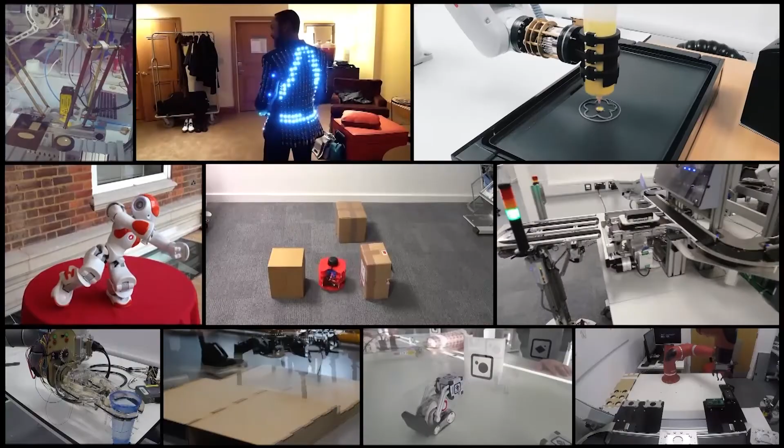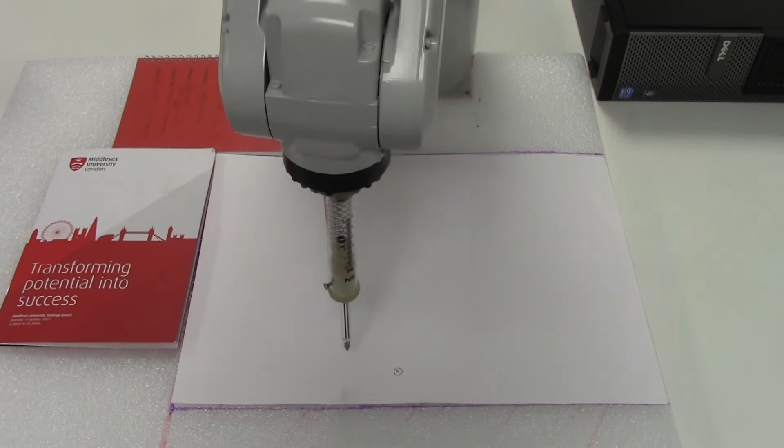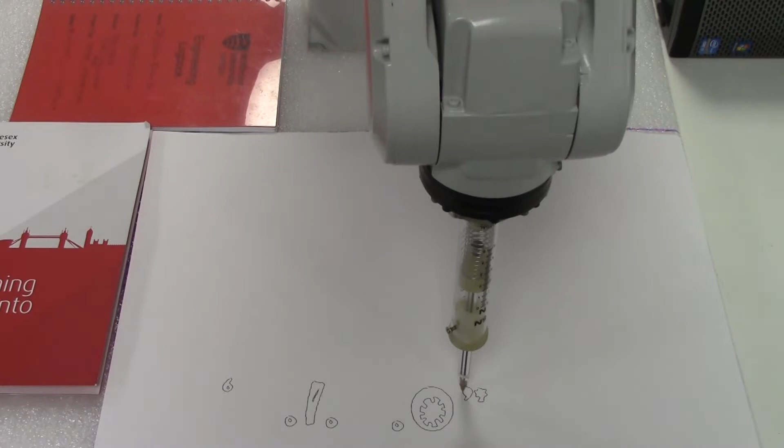In this video, we will learn how to manually jog the ABB IRB 120. Robot manipulators can be programmed to perform a certain task by moving through a series of clearly defined positions. Traditionally, this series of positions and orientations have been programmed manually.

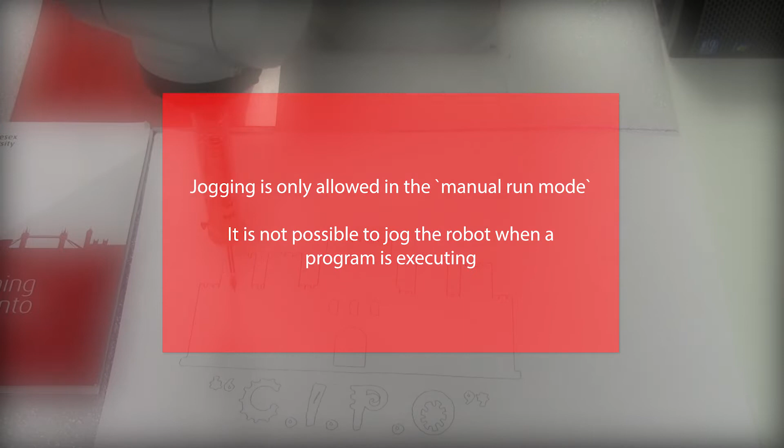Jogging is the act of manually moving a robot's joints or robot's position using a teach-pendant joystick. Please note that jogging is only allowed in the manual run mode, and it is not possible when a program is executed. However, you can jog the IRB 120 regardless of what view is displayed on the teach pendant.

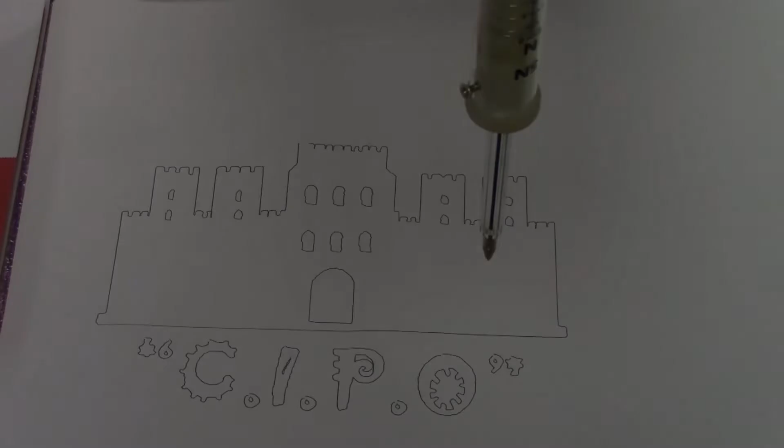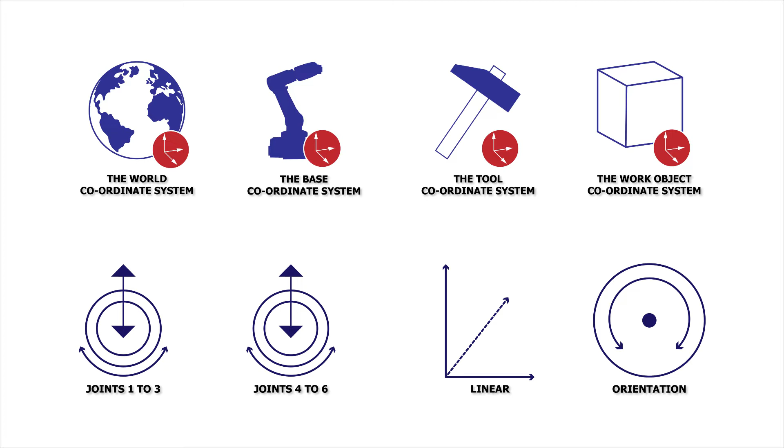The selected motion mode and/or coordinate system determines the way the robot moves. There are 4 selectable motion modes and 4 coordinate systems available by default on the teach pendant.

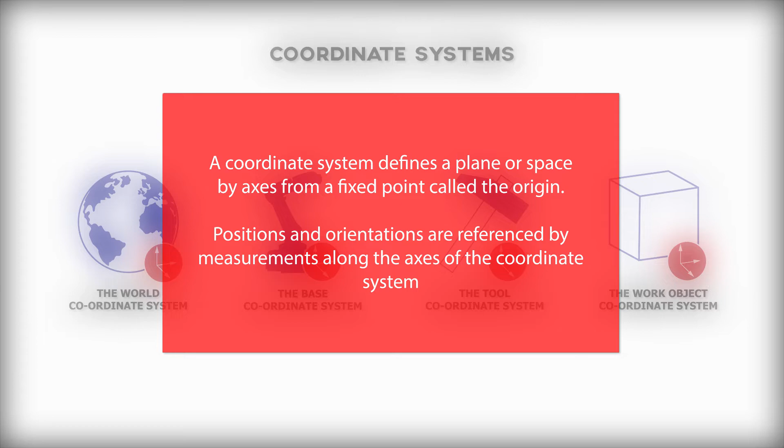A coordinate system defines a plane or space by axes from a fixed point called the origin. The targets and positions are referenced by measurements along the axis of the coordinate systems. The ABB IRB 120 uses several coordinate systems, each suitable for a specific type of jogging.

The world coordinate system defines the robot's work cell, and all other coordinate systems are relative to this world coordinate system. This is very useful when working with several robots in a workstation.

The base coordinate system has its origin located at the center of the base of the robot. This coordinate system is used to easily move the robot from one position to another relative to the base of the robot.

The tool coordinate system defines the position of the tool the robot uses when reaching the given target. This could be an end effector, a welding tool, a writing tool, or any other form of tools attached to the end of the robot.

The work object coordinate system is relative to the workpiece, and it is often the best for programming the robot to perform a specific task. To find out more about coordinate systems, please see the text in the description of this video.

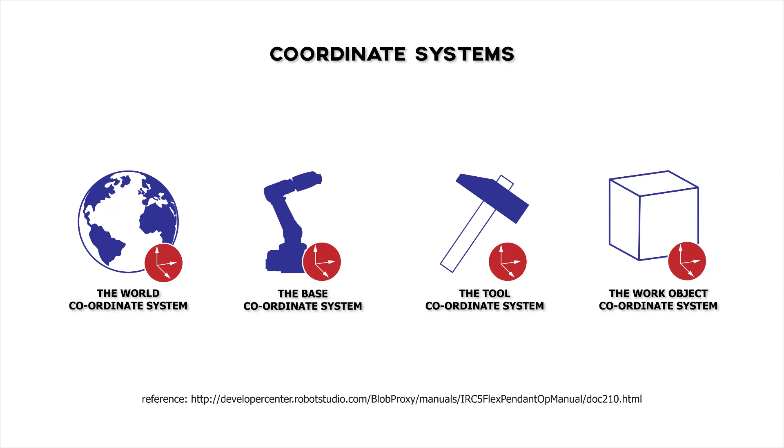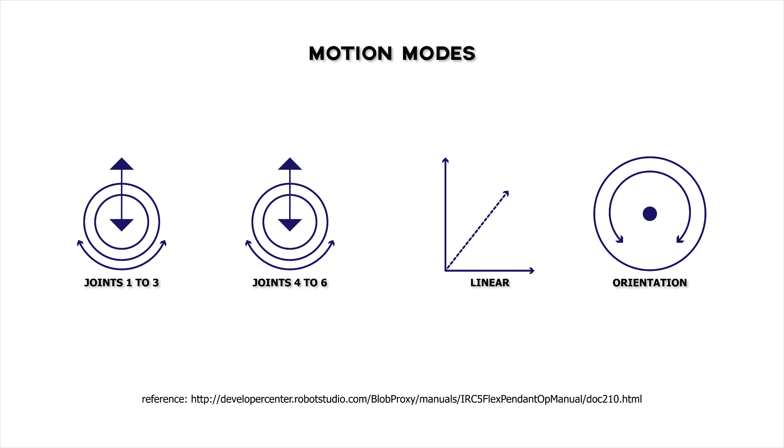The second motion mode allows you to control the last 3 joints of the robot using the joystick. Please use these 2 modes to roughly set the robot into your desired target pose.

The linear mode allows you to move the center point of the attached tool or end effector along a straight line, either in the X, Y, or Z direction. Lastly, the orientation mode allows you to set the orientation of the attached tool or end effector about its center point.

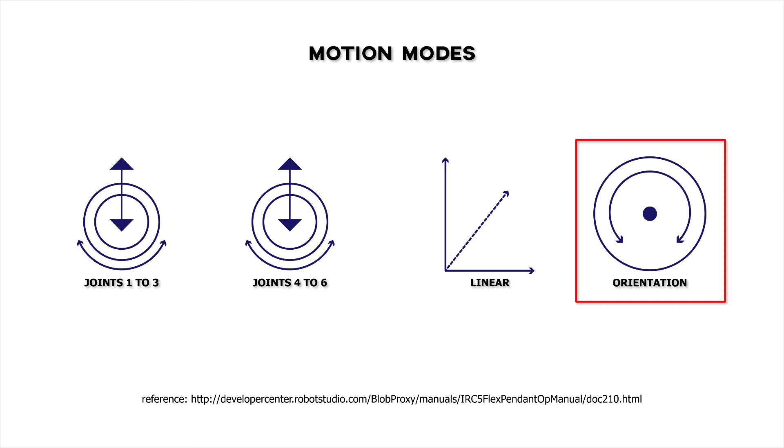So I'll be showing you a little demo on how to jog the robot using a flex pendant. Note that this is very similar to how it would be done on the actual robot, but I'll be using the software to do this. So on the flex pendant, ensure that you're holding the enable button, which was shown in the previous video.

And then you want to select the robot that you would like to jog and ensure that this icon is selected. When this is selected, you would see the 4 coordinate systems which were spoken about in this video, and all the 4 motion modes which you can use to jog the robot.

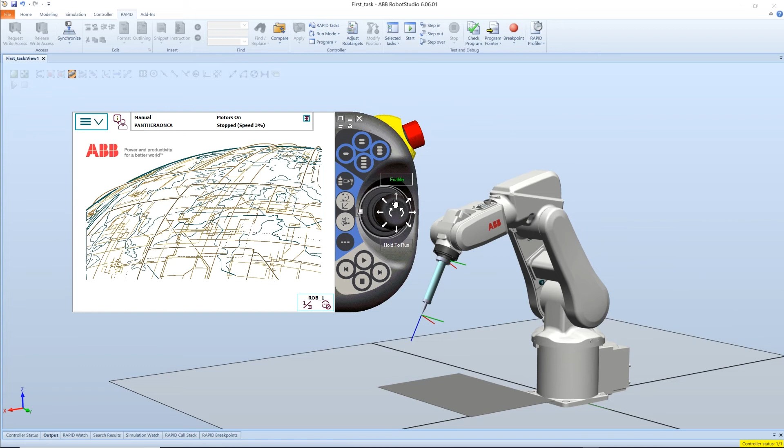So let's say I selected the first 3 joints. You can see that just moving the joystick, I can change the position of the first 3 joints.

I can also select the next one and change the position of the last 3 joints, and I can also select the linear and change the position of the end effector linearly.

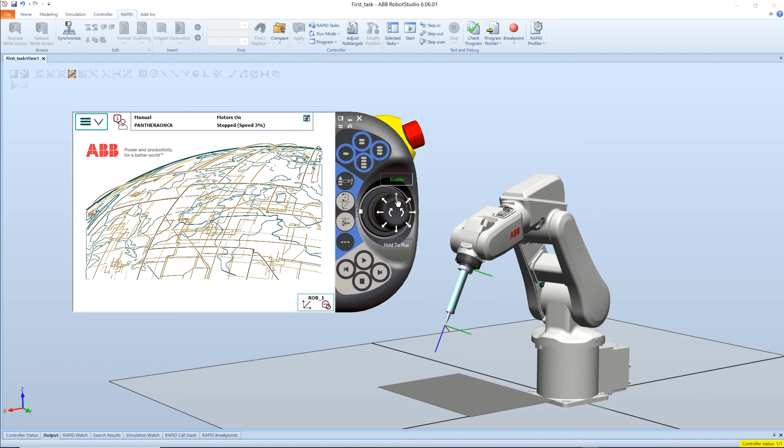If you noticed, when you selected the linear motion mode, these coordinate systems became enabled. Originally they were disabled, but when you select one of these ones, they become enabled. That's because these are specified based on the axis of the coordinate system.

So when you select linear and select the base coordinate system, the position of the end effector is relative to the center of the robot. But if you selected the world, then it will be relative to the center of your world, and likewise for the other coordinate systems. I hope this explains how to jog the robot.